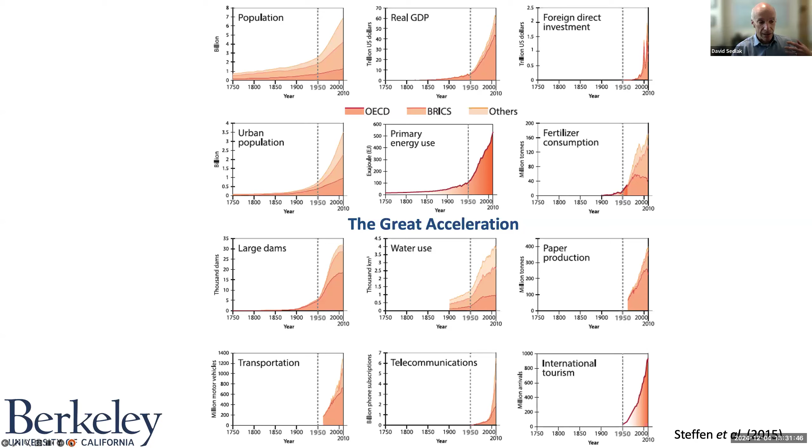The other underlying driver of change, and a need to think differently about water, that I develop in the book is climate change. I think many of us here have been thinking about climate change for decades, but not really having a full understanding of what climate change has meant for water supplies.

The important part here is that at the equator there's an equatorial region where a lot of water evaporates into the atmosphere, leading to wet conditions near the tropics. That air goes up into the Hadley cells at the equator, moving north and south. When it comes back down at about 30 degrees north and 30 degrees south latitude, the air is quite dry, and that's why we have the great deserts of the world, like the Sahara Desert or the Kalahari Desert, at those latitudes.

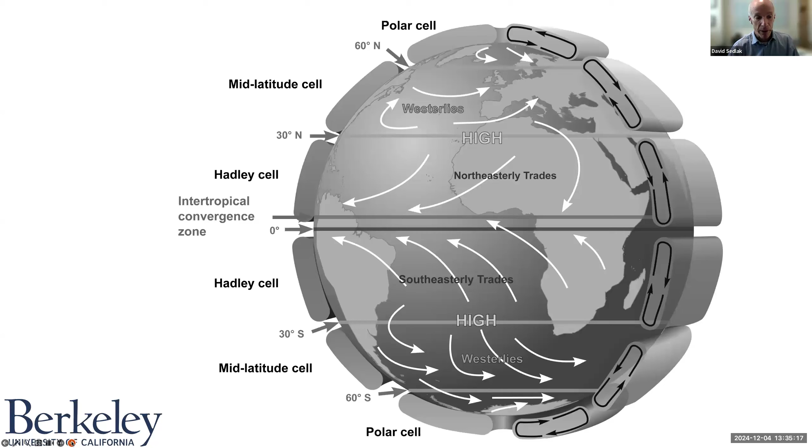So Water for All thinks about this, and about the separate water crises that are likely to drive change. Because these changes are so different in different parts of the world, I've chosen to break up these water crises into 6 separate crises.

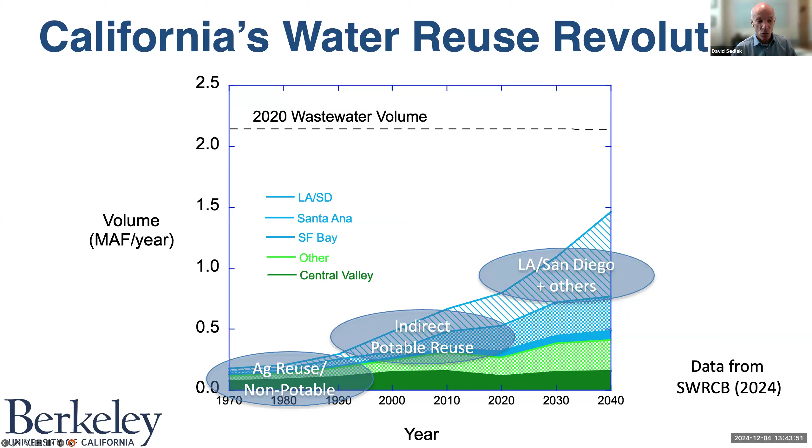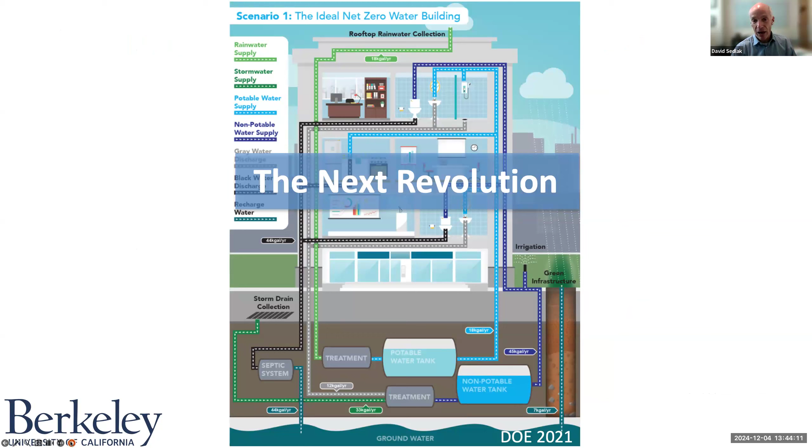But that is only the first stage. I think we'll be at a point in 2040 or 2050 where all the big centralized water reuse projects that can be built will have been built already, but there's still time for another water reuse revolution. That next revolution, I think, is going to happen at the building or premise scale - whether it's an individual building, a housing development, or an office park, I think what we'll see next is an increase in the amount of water that's recycled without ever going to the sewage treatment plant.

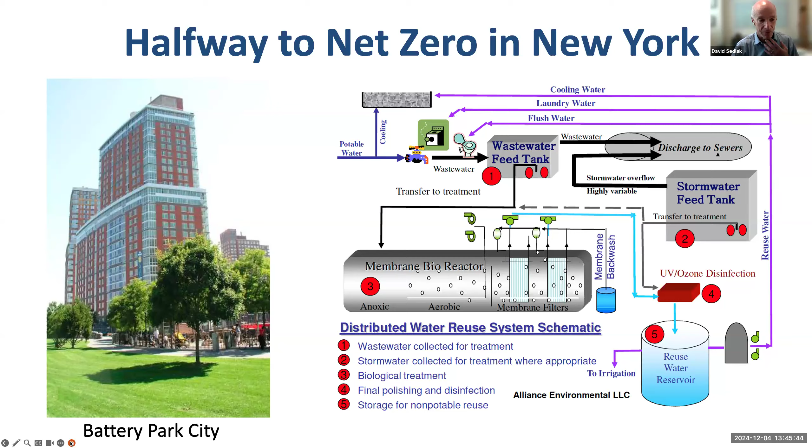The folks at SFPUC have had a wonderful program where these large, iconic projects built in the heart of San Francisco over the last 15 years or so have been required to either have some form of rooftop rainwater capture and reuse or in-building water recycling. We're seeing somewhere around 45 projects that have been permitted and about 30 more currently under planning. These projects take water produced in the building and use it inside the building - they're kind of similar to the ones in New York, getting water for things like toilet flushing and cooling towers, and that's been pretty good.

But I think where this is going to go in the future, and where it could be even more impactful, is if we could find ways to treat this water to the point where it's of potable water quality and we could reuse it in the building itself. It fits into a larger vision of our buildings being active parts of the water system.

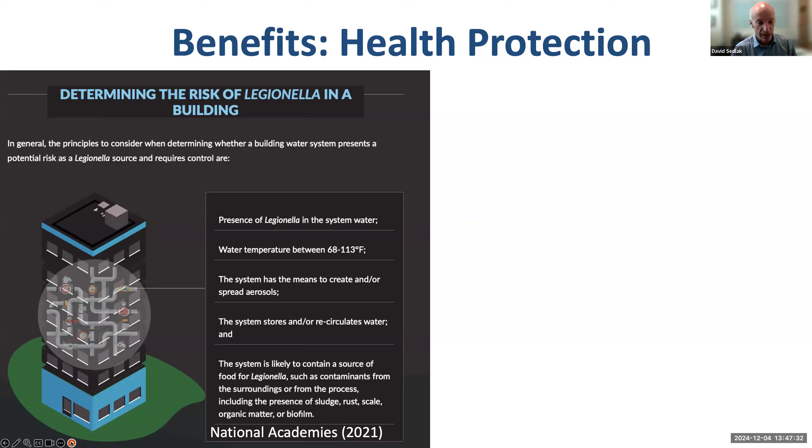One of the drivers for this, in my opinion, is that we could make the water coming into our buildings more healthy for us. This figure from a report that the National Academies put out a couple of years ago talks about the risks of Legionella, the bacteria responsible for Legionnaire's disease, and a lot of times it's harbored in the pipes within a building because those pipes don't have sufficient circulation of water and sufficient water quality.

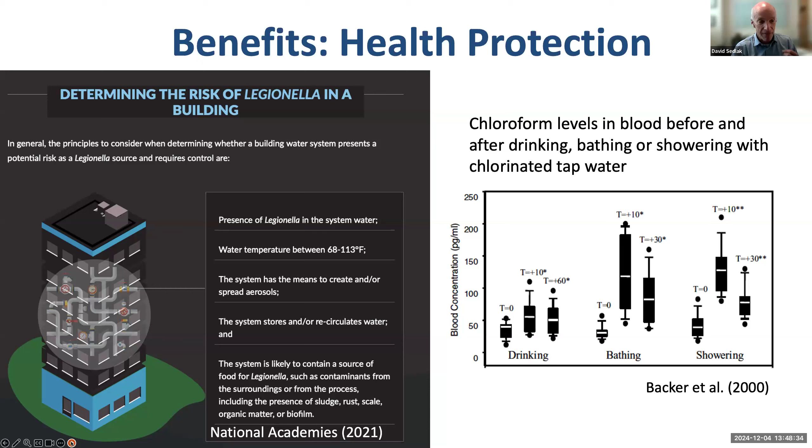Taking a 10-minute shower in chlorinated water gives you, in many cases, a higher blood concentration of chloroform than drinking tap water treated with the same disinfection processes. I think there's a possibility to make the water coming into our buildings, and the pipes in our buildings, safer by thinking about the buildings as part of the treatment system.

Part of my inspiration here was my youth growing up just outside of New York City, seeing wooden water towers on the roofs of buildings and realizing that those were in some ways like a bladder for a building—storing water and releasing it. While the water's sitting there, there might be an opportunity to filter or treat it, to think of it as the building's liver detoxifying it, the plumbing as a circulation system, or the building's control system as a brain.

In some of our research, we've been thinking about ways to use fully electrified electrochemical water treatment systems to improve water quality—you might stick a simple device powered only by electricity into one of these water tanks or into the building's water flow, and remove some of the contaminants that pose public health risks, or remove waterborne pathogens.

There are many examples we're increasingly seeing from the stormwater control area where controllers and sensors can be used to operate buildings much more precisely than what we're doing today.

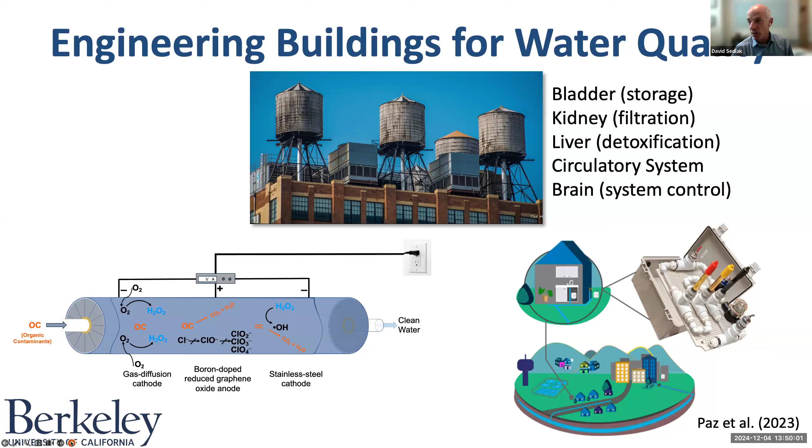The other aspect of using buildings as part of a treatment system is that it feeds into a larger vision of how water could be a key to green development. One inspiration is the so-called super blocks of Barcelona, where people are thinking about taking blocks of apartment buildings and making them a hub for better ways of living.

We completed an analysis of buildings like these in 2024, a techno-economic analysis of the cost of putting in in-building water treatment systems that harvested nutrients from wastewater and used them for vertical farming on the sides of the buildings, then sold the fresh fruits and vegetables to local residents. Like the system in New York we looked at, we saw a return on investment of less than 10 years. These are the kinds of things that could garner a lot of public support because they feed into a larger narrative of green living.

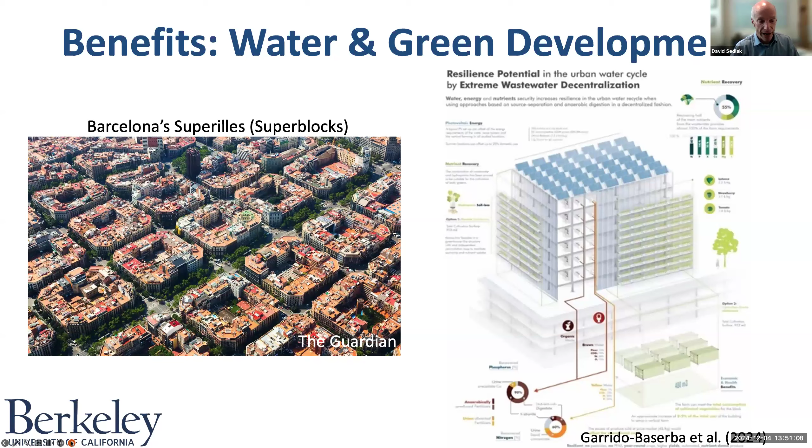We've also looked, a few years ago, at the cost and space requirements for in-building water recycling systems that could meet a building's entire needs—so-called net zero water buildings, where through a combination of things like membrane bioreactors in the basements of buildings, advanced treatment systems, and possibly rainwater harvesting, you could provide all of a building's water supplies. When we cost it out, we get to something like $1.5 to $2.7 per cubic meter, which puts it in the same cost range as modern seawater desalination systems in the United States.

But the difference is that's the price paid by the occupant of the building, not the price paid on the water bill. It turns out that by the time you add up everything else involved in the water supply, water is actually quite a bit more expensive than that.

So we get to a situation that looks like the early days of rooftop solar, where if you allow people to install in-building water recycling systems, they'll find it economically beneficial as long as you don't charge them a large hookup fee. And because this kind of technology would scale slowly, we don't think it would have a huge impact on municipalities' bottom line or their ability to provide services.

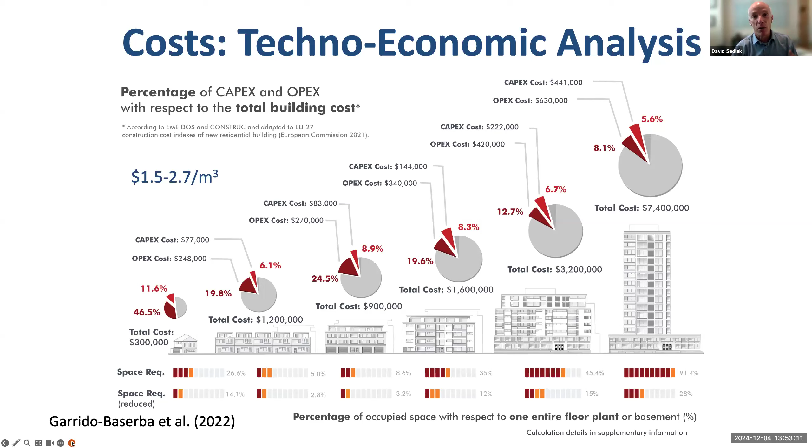So as I think about the future of these premise scale water systems, I think that they do have applications in places like San Francisco and other big cities, but perhaps their big applications will happen elsewhere. And the wealthy cities in places like California might just be the laboratories where they develop their economies of scale.

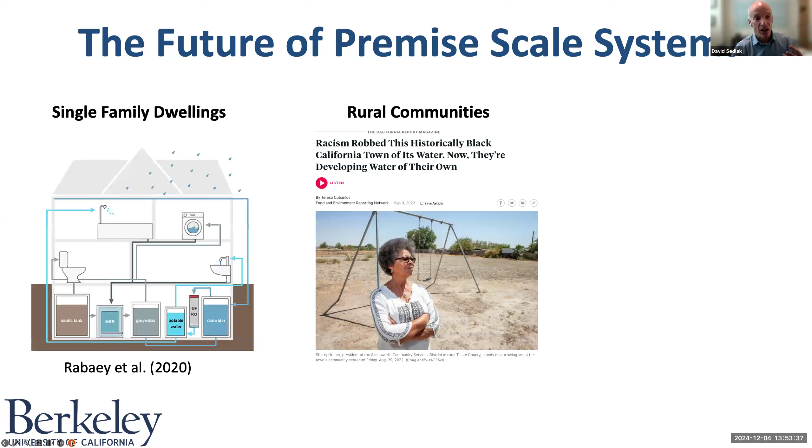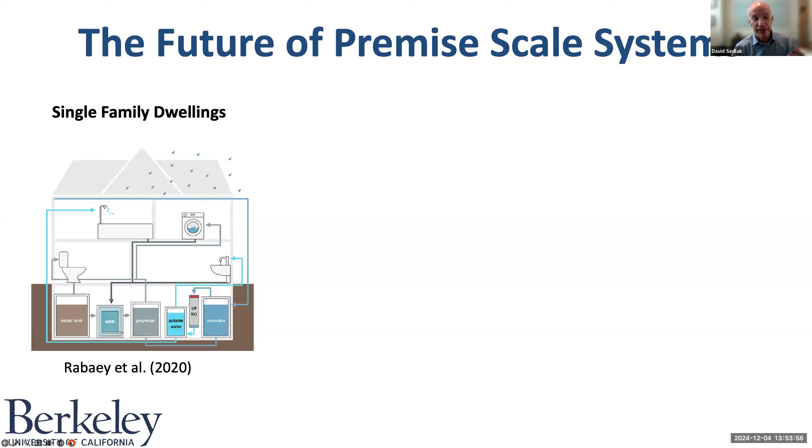And I could see applications in places like single family dwellings. We have a lot of places in the United States where individual homes don't have enough access to groundwater, or are suffering from water scarcity due to drought. Rooftop rainwater harvesting and water recycling in a home could allow people to live in places where the local water supply is inadequate. We could look to places like Allensworth, north of Bakersfield, a community where local farms had pumped so much groundwater that residents no longer had access to a water supply and had to rely upon trucked water being brought in.

And we can also think about some of those emerging megacities in sub-Saharan Africa and South America that I talked about earlier, where instead of building out their water infrastructure like we've done here in North America or in Western Europe, they might look to these kind of small scale, building scale systems as the way to go. And we already see signs of that happening in places like Bangalore in India, where there's a requirement for new buildings to have in-building water recycling. And residents are starting to see that as a feature that they want in their buildings because it means they'll have reliable water service. I want to turn my attention now to the issue of desalination in California.

We don't talk a lot about desalination, especially here in the Bay Area, and that's because we don't really have a lot of it. This study that came out from the Department of Water Resources recently showed the locations where we have desalination as a water supply, and right now we have somewhere around 43,000 acre feet per year of seawater desalination capacity in California. If you think about that, that's pretty small compared to the 700,000 acre feet per year of water reuse that we have.

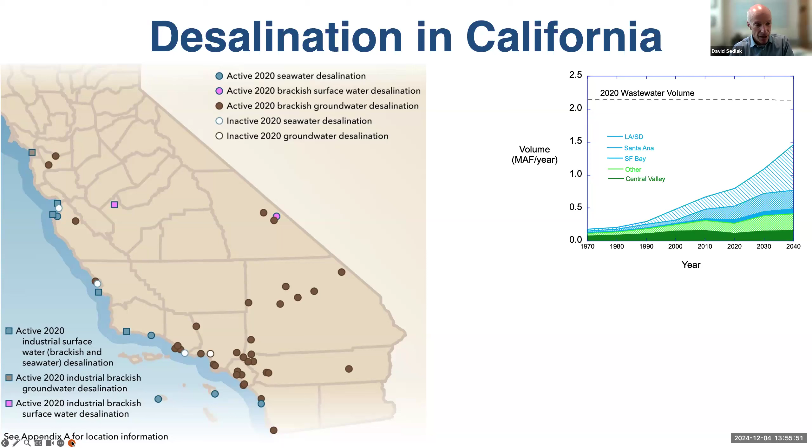So it's less than about 5%, or it's about 5% of the water reuse capacity we have. So that's part of the reason why we don't talk about it. But the other reason we don't talk about it is that there's been a lot of opposition to it.

So you may be familiar with the proposed project in Huntington Beach in 2022, which was rejected by the Coastal Commission. Or maybe you've heard about some of the controversies associated with the proposed plant in the Monterey Peninsula area, or you know something about the continued opposition to the desalination plant in Carlsbad, which is still, even though it's operating, a source of a certain amount of controversy.

And so if I had to pull out that magic wand, or maybe along with the magic wand, a crystal ball, to tell me about where I thought seawater desalination would go in California in the next 20 years, I'm not expecting to see many large seawater desalination plants. We might get a few small ones like the one that was built in Santa Barbara. But I think the real opportunity for desalination in California is small desalination and treatment of brackish groundwater.

And we heard a little bit earlier about how everyone was surprised by the project being run by the Alameda County Water District. But the real place where we're doing a lot of brackish water desalination is in Southern California. I just wanted to give you these two examples: the brackish water desalination plants north of Los Angeles in the Oxnard Plain, including the Oxnard desalter shown in this image, with some statistics in the text in the middle, and also in the Inland Empire area, where I'm showing the Eastern Municipal Water Agency as an example.

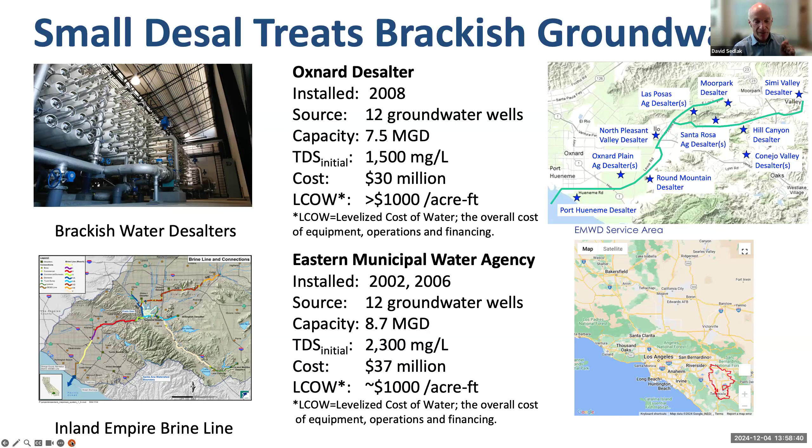In fact, in 2016, a consortium known as CV Salts, the Central Valley Salinity Alternatives for Long-Term Sustainability Program, proposed with a consultant the construction of a 280-mile-long pipeline to take brine produced by a group of over 30 desalination plants and move it up to the San Francisco Bay Area, where it would be hooked into East Bay MUD's outfall or some other way of getting it to the ocean.

That project would have cost somewhere around $11 billion, and the cost of water would be about 3 times as high as those projects I showed you a few minutes ago. So obviously this isn't the kind of project that's likely to be built, and part of the reason is the high cost of dealing with the brine.

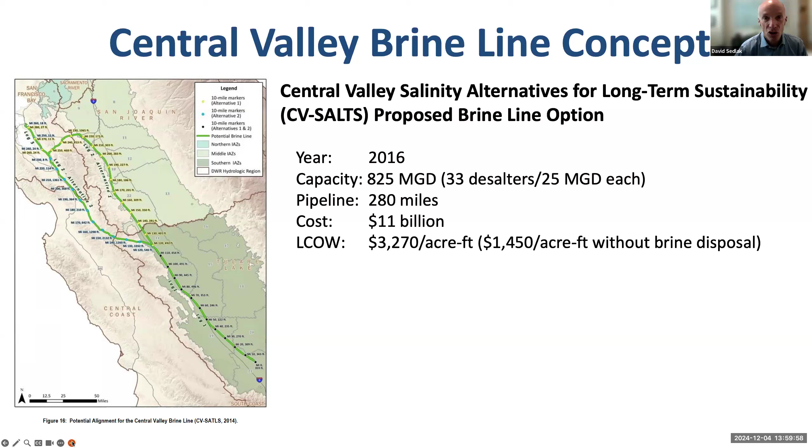But to me, what it showed was that there's a recognition that there's this resource of salty or brackish groundwater that is underexploited. Also, as more salinity problems arise due to the way we use water for agriculture in the Central Valley, there's going to be a role for desalination in the future. So we've looked a bit through the National Alliance for Water Innovation, a Department of Energy program, at this issue of alternatives to brine lines.

This is a figure from one of the papers we produced through NAWI a couple of years ago, looking at the possibility of using so-called zero liquid discharge—taking the brine from the desalination process, drying it, and then disposing of the crystallized salts in some way. What you can see is that the existing types of ZLD projects, A, B, and C here, can increase the cost of these projects by anywhere from about 25 to 75%.

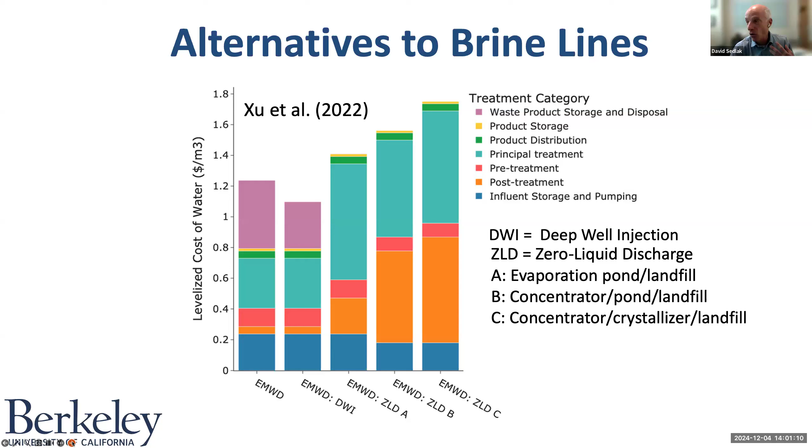But I think that initial analysis probably underestimated the cost of disposing of the brine. Right now, a lot of desalination projects that use zero liquid discharge simply send the salts to a landfill, and in the long term that's just not going to be a feasible way to go. So we really have an issue with this question of brine disposal.

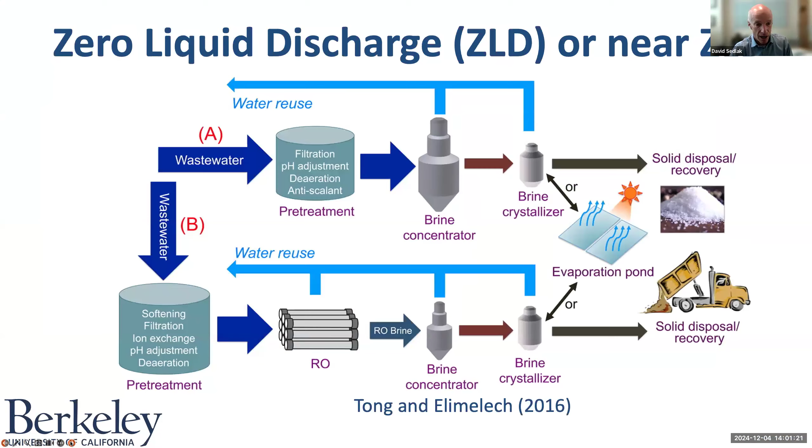I'm going to move through these slides and talk about what I really wanted to talk about with respect to brine disposal: the idea that if we could take the brine produced by desalination and make it into a valuable product—what people refer to as brine valorization—we might have a way of taking advantage of the relatively low cost of brackish water desalination and converting this waste not into a pile of undifferentiated salts, but into valuable products that could be used by industry or agriculture.

One of the inspirations for this was a project that started at the Kay Bailey Hutchison brackish water desalination plant in El Paso a few years ago. A small company called Environmental Water Minerals had a proposal, and they built a plant that took the salt produced by that plant and produced caustic soda, sodium carbonate, hydrochloric acid, gypsum, and magnesium hydroxide—products commonly used in industry—with the idea that instead of paying someone to dispose of the brine, you could sell it into industry.

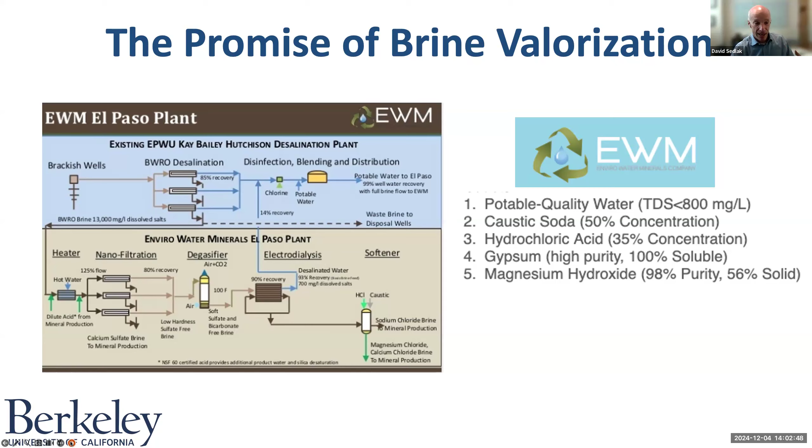That company, EWM, was not successful in terms of their projects, in part because they came into the design process so late. But as part of the DOE's NAWI program, we've funded a project looking at ways of improving the technologies for valorizing the brines from desalination plants, and we're starting to look at the techno-economic analysis of this and the technology feasibility.

But my prediction is that in the long run, rather than thinking about desalination brines as a source of waste that has to be piped to the ocean, we're going to start looking at it as a source of products we can use. In the case of agriculture, many of the things we take out of this brackish water brine, whether it's potassium, magnesium, or sulfate, are all used in agriculture as fertilizers.

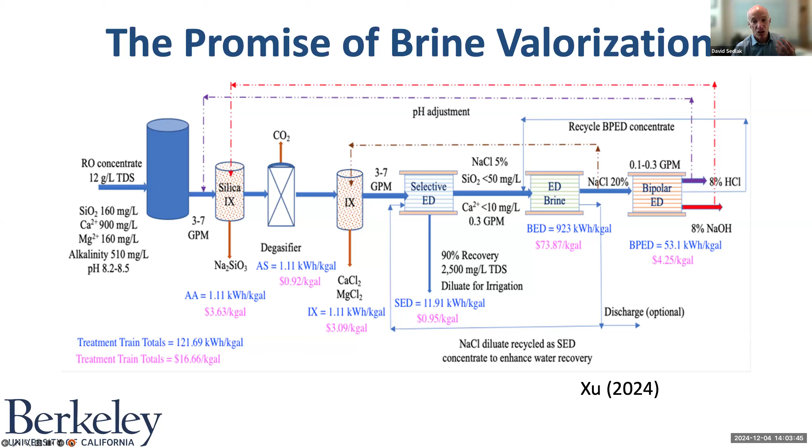So not only are we producing things like caustic and hydrochloric acid, we're producing gypsum and potash, which can be used in agriculture. Thinking about this original proposal that CV Salts had, which is likely a non-starter, and thinking about the high costs of water that farmers, especially in the southern San Joaquin Valley, are already paying—especially when they use it to grow high-value crops like nut trees or fruits—and thinking about building small desalination plants where water could be...

...desalinated as needed in small locations where this high-value agriculture takes place, we're starting to see the outlines of the spread of desalination into agriculture, where in the initial years, salty water could be desalinated, allowing it to be used to grow high-value crops.

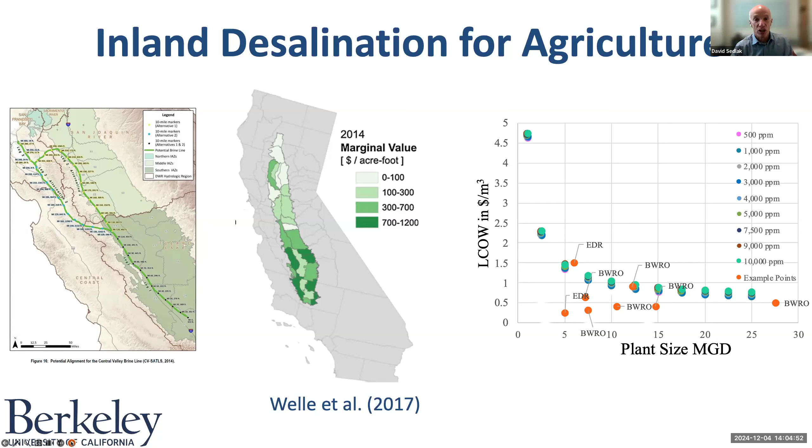And the brine produced in the process could be valorized and turned into fertilizer, or at least the volume of waste that would have to be disposed of would be small. And this would allow an industry to start to grow and drop the cost as more and more people become familiar with it and start to adopt it.

This idea of thinking about desalination, and also to another degree reuse, and its role in food security is starting to catch on beyond just ideas in California. Last spring, the UN Food and Agriculture Organization held a workshop in Rome looking at this idea of brackish water, or rather desalination, and its applications in agriculture.

And I was, as a member of that workshop, quite impressed by the projects already taking place in places like Spain and North Africa, where desalination is starting to be used for high value crops. So thinking about these new technologies like direct potable reuse, building scale water recycling, and desalination of brackish water followed by valorization, I like to take inspiration by thinking about the history of solar photovoltaic power. So I'll take you back to 1976, to Jimmy Carter being president in the White House.

And maybe some of you remember when Jimmy Carter had the solar panels installed on the roof of the White House. And maybe some of you also remember how when Ronald Reagan became president, he had the solar panels pulled off the roof of the White House.

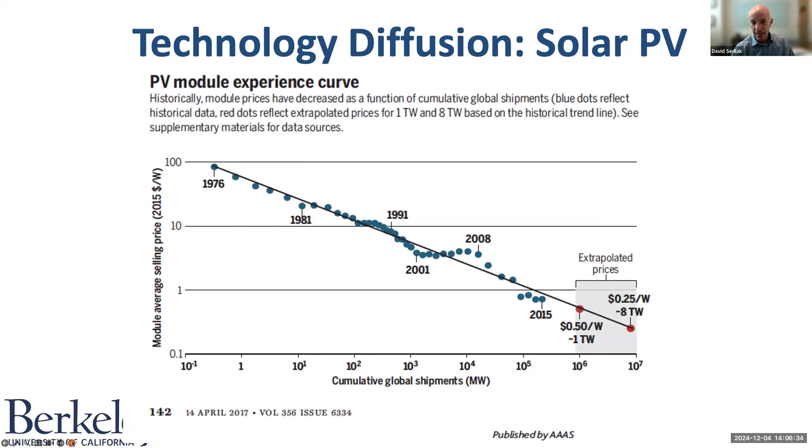Well, I think Jimmy Carter had the last laugh, because in the years since 1976, the cost of installed solar production has dropped by over two orders of magnitude. And now the idea of rooftop solar panels has become commonplace.

And I think that we can say safely that the cost of seawater desalination may bottom out, but those other technologies that I talked about earlier, they're in their infancy, and we could imagine them dropping in cost by orders of magnitude over time if we are willing to give them an opportunity to develop and grow, and possibly even subsidize them in the early years.

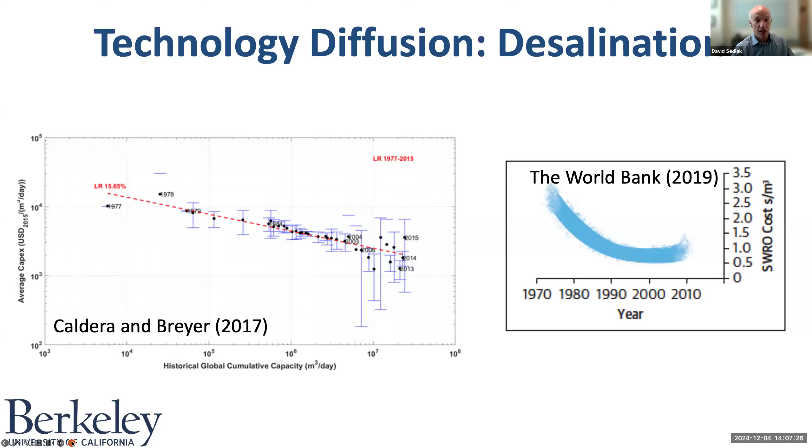So a few takeaways from maybe the larger view that I try to relate in Water for All. First of all, I told you a little about these six global water crises. I think that they're all going to become more prominent in the coming decades as the impacts of population growth and climate change become more extreme.

I don't think that there's any one solution to the world's water crises. I gave you kind of a view today that is a little bit more technology heavy. I think there's lots of room for policy solutions too. I think there are a lot of bad policies out there that if they were corrected would help us solve water crises.

But I wanted to give you a view of some of the technologies that were around the corner. These technological solutions are going to continue to decrease in cost over time. And the technologies that are developed in some wealthy countries, especially here in California, have a lot of potential to spread to other places, just like solar panels and cell phone technologies, and many other ideas have spread to other places.

And finally, I'd like to end with this idea that really the view of having a shared stewardship of water - and I think that's really the view that I appreciate so much from Acterra, and that so many of the participants of Waterpalooza share - is that we have a shared responsibility for water. And I think that's the only viable path for us to get to water for all. And with that, I'll stop sharing my slides and welcome any discussions or questions you might have.